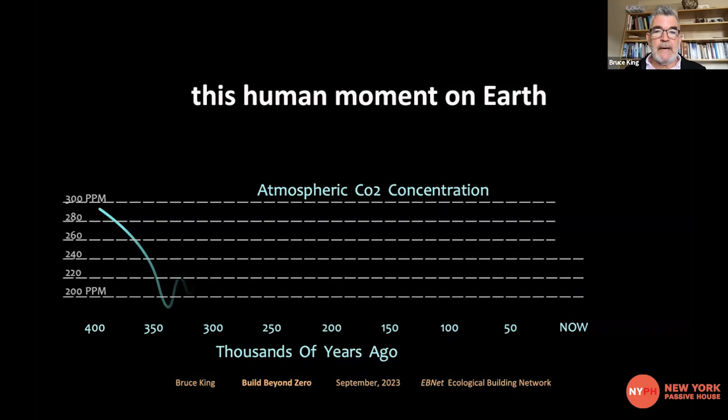Let's do a quick review of the context we're in. For the last 400,000 years or so that our particular family of primates has been evolving on Earth, carbon dioxide has been more or less steady between 200 and 300 parts per million.

And of course, a couple hundred years ago, we went wild when we discovered fossil fuels and all the goodies that go with that. Now the price tag is coming due and we're finding ourselves in dire straits. Last I checked a couple days ago, the count was 419 at Mauna Loa.

Here's the thing. Even if we were to stop burning fossil fuels on a dime today, we would still be in trouble. Common sense and the IPCC tell us that we have to pull carbon back out of the air in addition to stopping the burn.

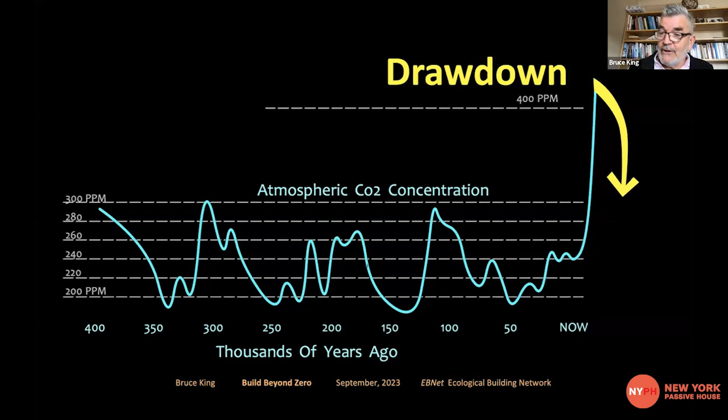Which brings up the question, where are you going to put it? Right now, the oceans are doing most of the heavy lifting for us, which is proving to be disastrous for the oceans and oceanic life, and therefore for us and all other life, because everything is based out of the ocean. Where might we put carbon if we draw it out of the sky successfully?

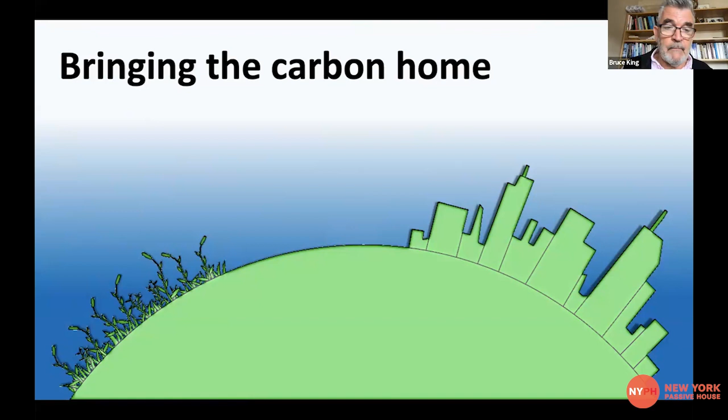Well, the first and probably the best and maybe the biggest repository is soil. There's all sorts of people, some of them in this room I'll bet, doing work with regenerative agriculture. How do we grow our food and restore the carbon in the soil that we've been depleting over the last couple hundred years?

Another one is to pump it underground. That's very popular in certain circles. Right now, the US taxpayer is paying oil companies to pump carbon dioxide into depleted oil fields to replenish them and get more oil and gas out of the deal, and then claim they're doing climate work. Something a little screwy about that scenario. And we're not quite sure about the durability of the carbon down there. It could become a problem later on.

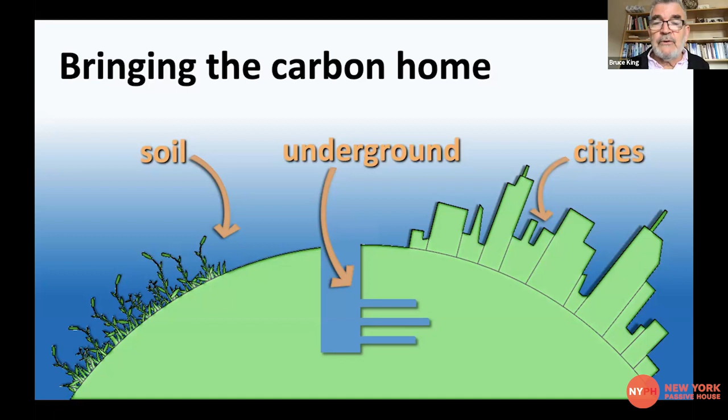Then there's us, architects and engineers, designing buildings and cities at a fast clip. We use more physical stuff than every other industry combined in our construction, and we're doing a lot of it. In case you hadn't heard, we're building the equivalent of another New York City on Earth every month right now.

Buildings account for about 40% of greenhouse gases. I'm pretty sure you've heard that. It comes in two phases. First you build it, the embodied or upfront emissions from the materials and products you chose and the trucks roaring around. Then everybody moves in, turns on the lights, turns on the HVAC, and over the course of 40 or 60 or 80 years, the operating emissions eventually dwarf the embodied emissions for just about every building type.

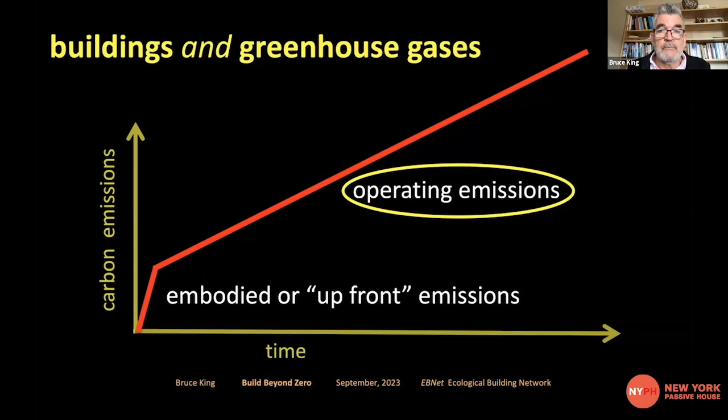And so that's what we've been focusing on in green building, right? That's why you're gathered—passive house and net zero movements all over the place. And it's great. We brought those operating emissions down with great success on at least some buildings to or near zero.

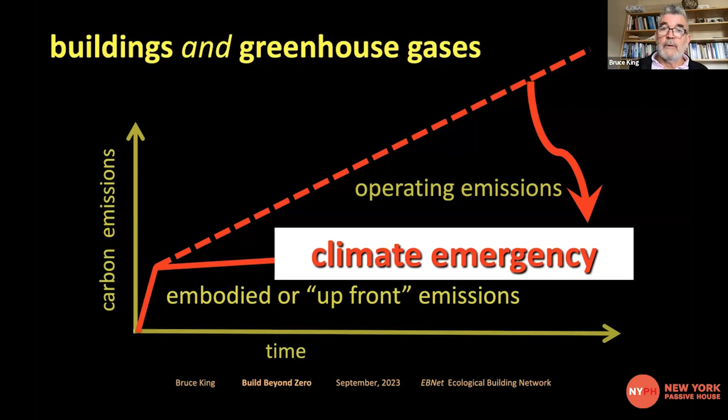Problem is, we have a different context now that we weren't really aware of even 5 or 10 years ago. We're in emergency now. It's not just climate change, it's climate emergency. We're feeling the effects all over the place. I'm in California with the fires. You're getting the hurricanes. Somebody else is getting the floods. It's happening now. What can we do?

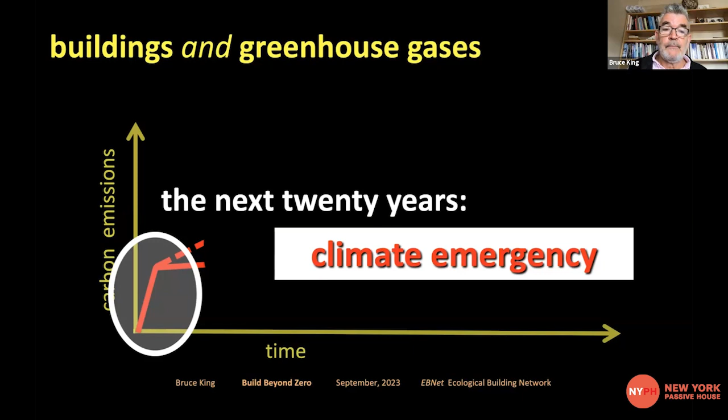What can we do in the context of climate emergency? Well, think triage. Think the next couple decades, not the 60 or 80, 100-year lifespan of the building you're designing right now, but the next 10 or 20 years. In that context, things look quite different. And the embodied emissions prove to be much bigger because they're in the air longer. It's not just how much carbon you put up there, it's how long it's in the air. And the embodied emissions are up there cooking us away before you even move in to occupy the building.

How do we get to zero and beyond? How do we get to regenerative? How do we get to where business as usual is buildings and cities, every one that goes up is taking carbon out of the air rather than putting it in?

Two basic categories of building: minerals and plants. Those are the two categories of stuff we build with. Minerals, it's mostly about concrete. That's by far the biggest. If it were a country, the concrete industry would be the third biggest emitter on Earth after China and the USA. It's huge.

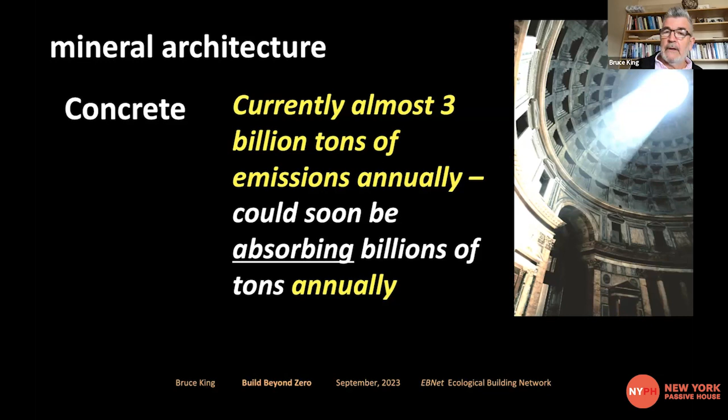And it could flip all the way around in just a generation to be a carbon absorbing entity. I first heard some years ago that we're making something like 10 billion tons a year, mostly the Chinese and the Indians, of course. I got to wondering about the numbers because we see these big numbers, 10 billion tons. Well, your eyes glaze over, you go, yeah, another big number. So I did the math. 1 ton of concrete is desk height. 10 billion tons of concrete is a cube a mile on a side. It's 5 times the height of the Eiffel Tower, and that's what we're producing every year. Pound for pound, concrete is a very low carbon material, but a cubic mile of anything is going to have some impact.

Metals and glass are the other two big mineral products we work with. And since they're already operating at a very high recycling rate, you're going to hear more about that in a moment with Positive. Their big bet is on hydrogen. Replace that intense fossil fuel energy, the intense energy that they need to melt glass and metal, and replace fossil fuels with hydrogen, and then replace the hydrogen available today with green hydrogen made from renewable energy. And that's coming on strong.

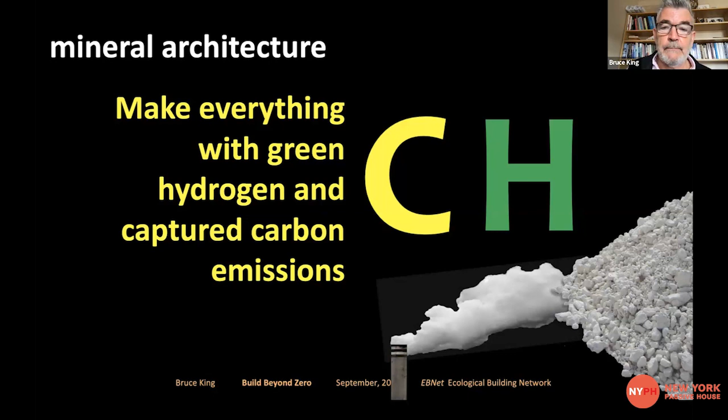Then you got plants. Let Mother Nature do the work. Let her gather the carbon out of the air and then use the plants to build with from the forests and from the fields.

You need to understand about plants, whether it's grasses and hays or bamboo or timber and mass timber, that a lot of the carbon is in the ground. A lot of the carbon is out of sight. The plant you see is only a portion of the mass of the plant and the carbon that's being stored in any particular location. So how we harvest those plants matters in the climate picture, because a lot of that carbon's underground. And if we muck it up, we're making more of a climate mess rather than fixing it.

Mass timber. Everybody loves mass timber these days, and all sorts of cool buildings are going up. It is cool. We couldn't do this before, but we worked out how to cut the wood and glue it back together in ways that originally was just plywood, then OSB, then glulam beams, and now it's mass timber, and we can do large buildings with mass timber that previously we could only do with steel and concrete.

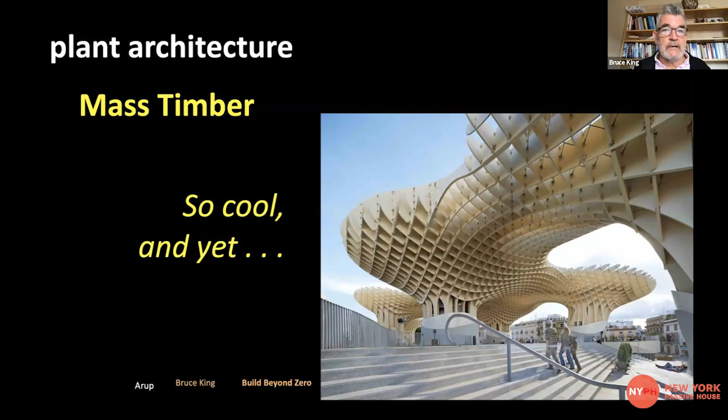Let's just say it's muddied, and at the very least, you should use sustainably harvested lumber when you do use lumber. FSC certified is your best bet.

Well, straw, right. The world grows a lot of straw. I told you about that cubic mile of concrete. The world also grows about 1.6 mile cube of straw every year, which is the waste product left over after you've taken the barley and the oats and the rice that we eat. The straw left over, which at great quantity becomes a waste problem for the farmers. If we turned all the current straw harvest in the world into insulation materials and building products, we would negate all the emissions from the concrete industry. Chew on that.

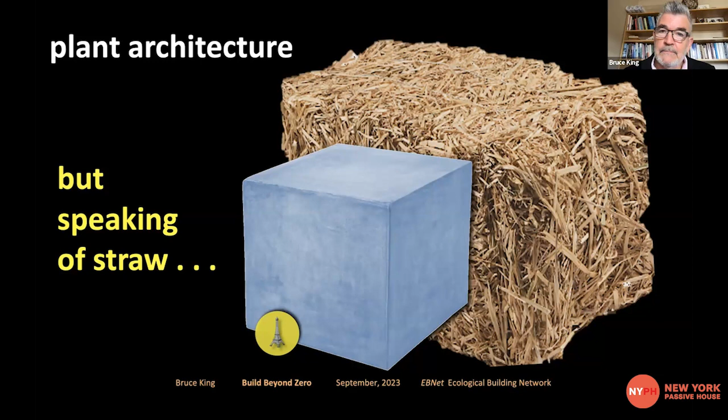We've been building with straw for millennia, actually. It's one of the original building materials, stuffing it into walls and putting it under our beds and so forth. But it sort of had a new beginning with straw bale construction invented in the Americas, in western Nebraska, actually, 120 or so years ago. Very picturesque, and some of those buildings are still there. People went back and studied them, and a renaissance came out of that 30 years ago, and it became this big thing. Straw bale construction still is a big thing, but you're not going to build another New York City out of bales of straw.

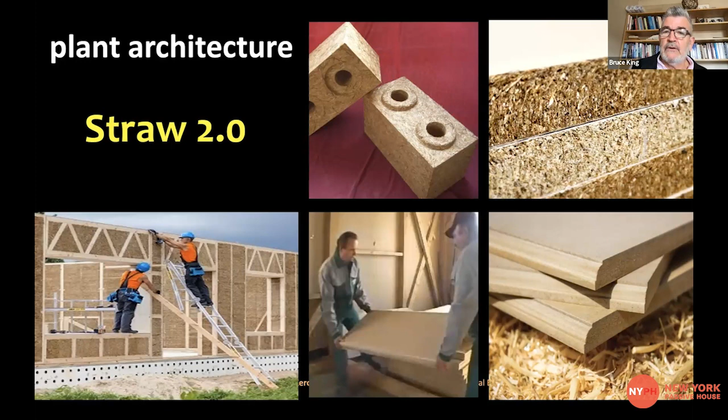So what can you do? You can have straw 2.0, and now there are more products than I can keep track of all over the world using straw as their feedstock. Blocks, insulation systems, spray insulation systems, panels. The French in particular are way ahead of us on this, doing fabulous buildings, big buildings, routinely all over the place. The British are doing stuff, the Australians, the Canadians. Straw bale construction itself, like those other two American inventions, democracy and jazz, has spread all over the world just on its own merits. People love it. It's a fun way to build.

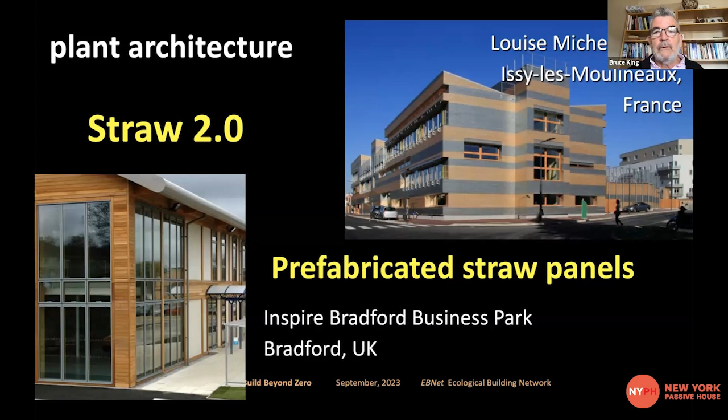And now it's going urban with straw products that accommodate where you can't have a wall that's this thick, you have to go this thick. What do? This is the answer. And just by the way, you can insulate with cellulose. You're going to hear more about that in a moment too, with wood chips, with wood sawdust, with straw, with hemp. And they all absorb carbon. They store carbon in your building, unlike those spray foams that are emitting huge amounts of carbon with their application, especially the spray ones because of their blowing agents.

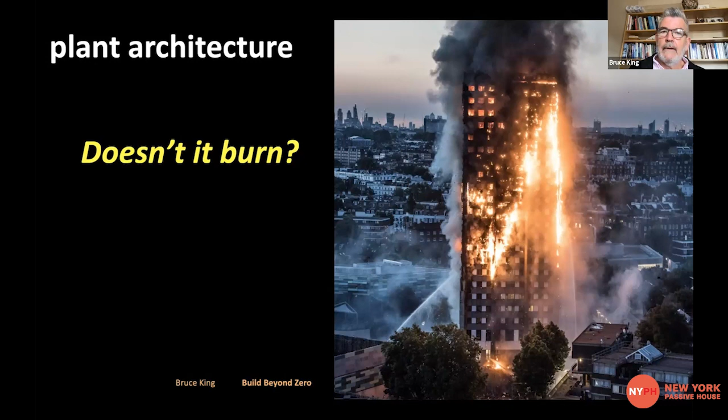People sometimes ask us, well, straw, it's going to burn, right? Sure it will if you give it a chance. So will plastic foam. Some of you will remember Grenfell Towers, right? 6 years ago, a bunch of people died. And that wasn't because they used straw in the walls, because they used a petroleum product to insulate the building, which fed the fire. Something about our culture is we think, oh yeah, plastic foam, that ought to be fine, but straw, I can't trust it. Well, making your building out of petroleum products is kind of inherently problematic with regards to fire.

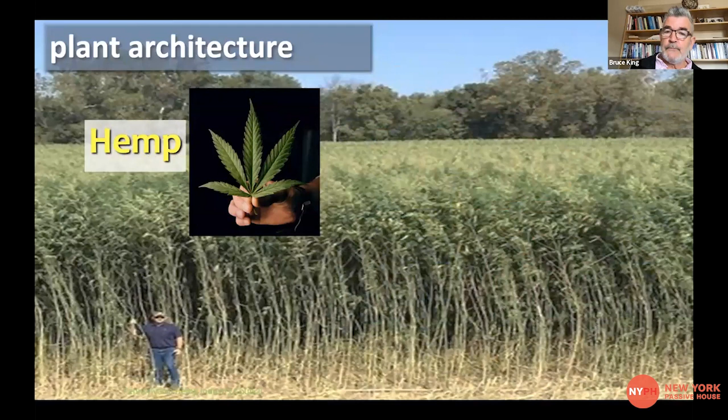We have some bespoke crops that are coming on strong. Hemp, one of my favorites - it's just great, you can do all sorts of stuff with hemp. There's a reason why our ancestors used it to make rope for their sailing ships - among all plants, it has one of the strongest fiber and aspect ratios at the cellular level. So it's very tough, durable, and strong. Make blocks, insulation, all sorts of stuff, and many products coming online.

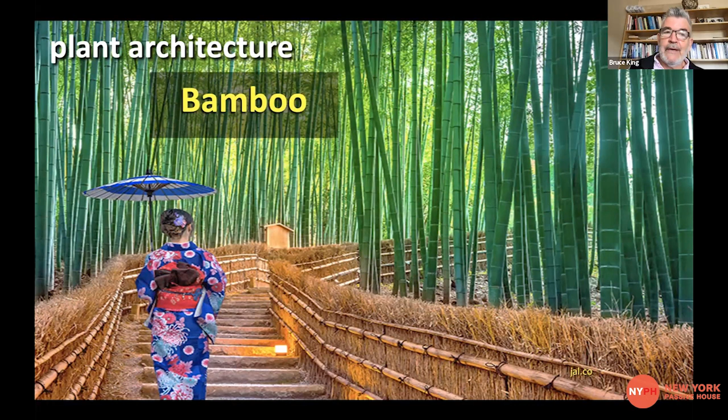Likewise, bamboo also grows like a weed, and by itself you can't do much with that strange, lumpy looking huge piece of grass. People do, and there's fabulous architecture going up in South America, Central America, the Pacific region. It's not what you'd call affordable housing, but certainly beautiful, very labor intensive, very lovely. Okay, not relevant to us, right?

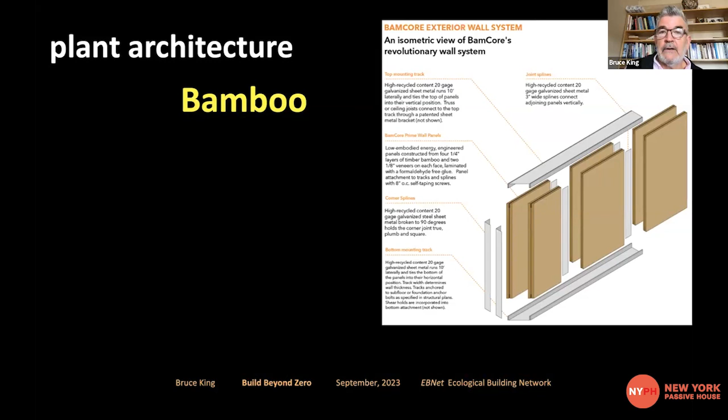Well, but then people started playing around with the bamboo, and you take those bamboo columns and squish them down and glue them together like we do with wood now, and you can make panels. A company out here in California, BamCore, is doing that, making panels that have a whole lot of extra energy efficiency. You can build a wall without any studs that are thermal bridges.

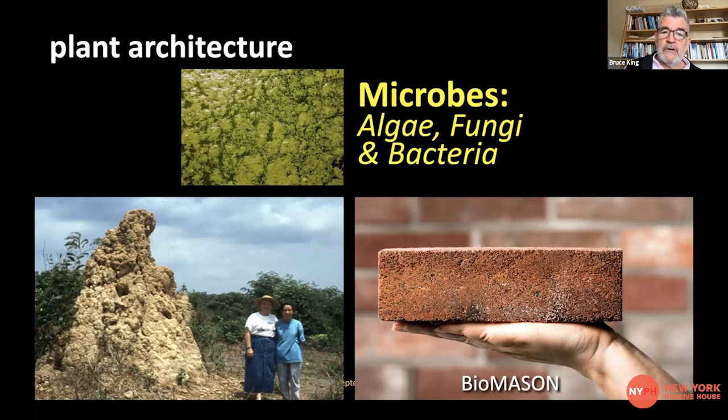Possibly the biggest one is microbes - using our little friends, the algae, fungi, and bacteria that we're only starting to learn about, to make concrete, insulation, all sorts of things. And among all the building materials, they stand out - not because you can see them, because you mostly can't. But of all these plant products, the microbes stand out for this very reason.

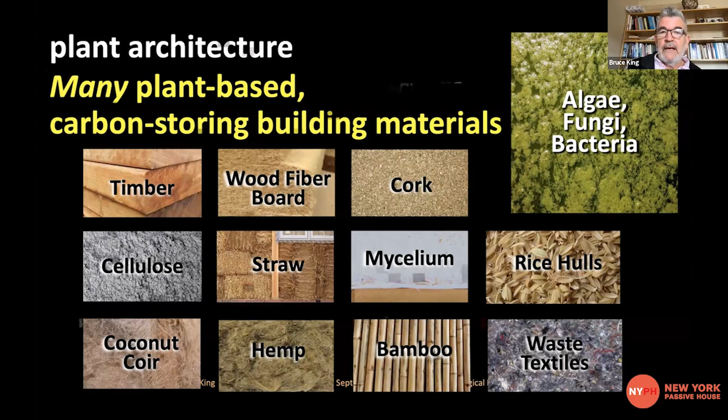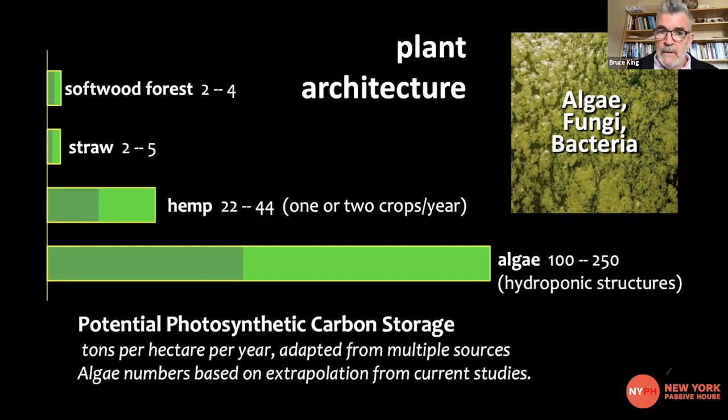My friends did some studying a couple years back to find out how much carbon you could store per acre, per hectare of land. A softwood forest: 2 to 4 tons. Straw field: 2 to 5. Hemp, looking much better: 22 to 44. Looking real good, right? But then when you look at what microbes can do - theoretically, nobody's got an acre of microbes growing and creating stuff yet, but people are developing microbial concrete, microbial insulation, microbial glues, just about everything. And that's where we can really seriously store some carbon.

It's surrounding you with hundreds of different polymers in the building you're sitting in. It's on your body, you're wearing it. It brought you your last meal. It's everywhere - the utility is fabulous. And the horror of it is starting to become clear to us because it won't go away. You throw it away, think you're recycling it - it ends up in a landfill, in the river, in the ocean. Then it breaks down and chokes all the little ones, all the life, all the plankton that are the basis, as we now know, of life on Earth.

What do we do about that? We could have a whole day about that, couldn't we? There's lots of people working on it, but please be conscious, please be sparing. I did a project here in the Bay Area with a wonderful Silicon Valley power couple who were really great people, and they wanted to build the greenest possible house. Among other things, they had a goal of no plastic, and we couldn't do it. We could eliminate it in a lot of places, but the insulation on the wires and a few other places - we couldn't have all the goodies everybody expects with a building without the plastic. So we've got a big job on our hands replacing that.

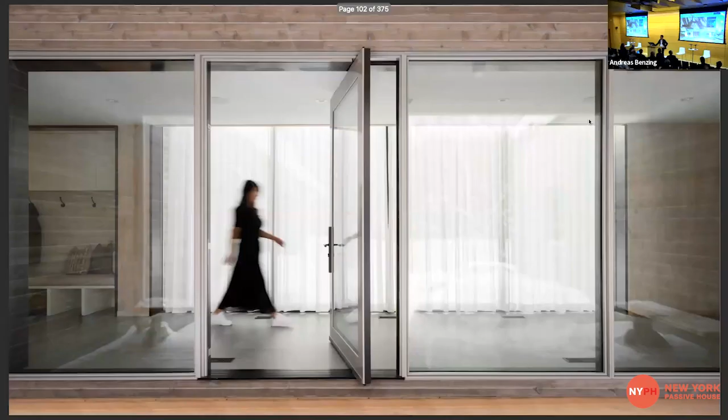As I got into it and developed my understanding of what buildings meant to the environment, I realized that just building a beautiful building isn't enough. We have to be really focused on the impact those buildings have, because we as architects have an outsized impact on the environment. Taking that seriously is extremely important.

As I developed, I realized we had to focus first and foremost on emissions, which is why we certified and built the first passive house in Maine, the 12th in the United States, back in 2008. That was really early days for the North American passive house movement. All these buildings you see here are passive house certified, close to the standard, or net zero. That's all we do and that's all we build.

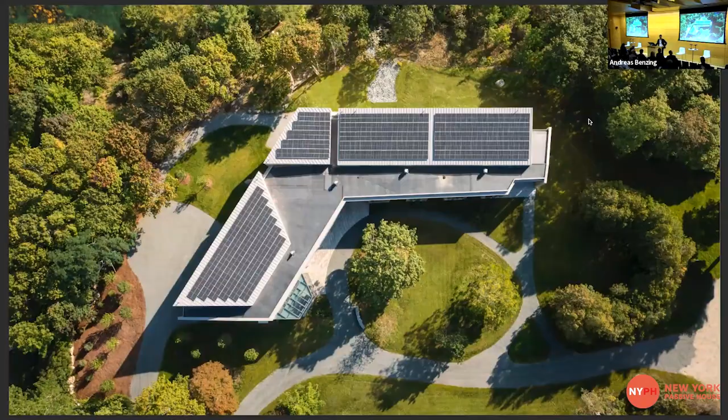But we also realized the more we got into it that passive house is great on operational carbon, but there's a lot more to the story, just as Bruce so eloquently described and the previous speakers did. So as we were focused on building lovely buildings to the passive house standard, we realized it's time to focus on the materials we're using to build with as well.

So getting onto the three companies that I have: Opal Architecture, that's the work that you saw. Timber HP, we're a startup manufacturing insulation from the residuals of the lumber industry, the waste stream. And Opal Build is a CLT panelization company, sort of the love child of Opal Architecture and Timber HP.

This statistic is widely known, shown at least 3 or 4 times today already. Buildings emit a lot of carbon into the atmosphere, a third to two-thirds operational embodied. That's why I started in passive houses, probably you all did as well, which is a great solution to reduce operational carbon as the baseline for net zero construction.

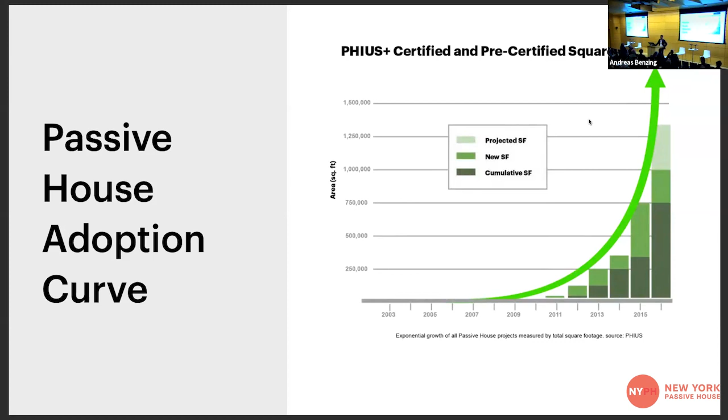We can take pride in the fact that this has adopted a hockey stick curve of adoption in the marketplace, and has really influenced conversation and policy around the country, which is critical to move forward, particularly on goals to net zero. This is a statistic by the AIA 2050 goal of net zero buildings, meaning our cumulative carbon over that time period will level out to zero as defined by net zero in terms of carbon.

That's a huge victory. When I started in 2008, I never would have believed it would be possible, but I do think it's possible now. But as Bruce also said, the embodied carbon of all those new cities we're building year after year is going to be equivalent to the savings of operational carbon from here going forward. So we really do have to focus on the materials and the carbon in the materials we use to build our buildings.

When we started looking at the project, I'll admit I wasn't interested in embodied carbon at first. I was interested in the human health of the installers putting the materials up. I had a design-build company and was constantly getting complaints about what insulation is like to install, and I took that seriously. But looking at this detail, a statistic by RMI, Rocky Mountain Institute, you'll see insulation has the greatest opportunity for carbon reduction.

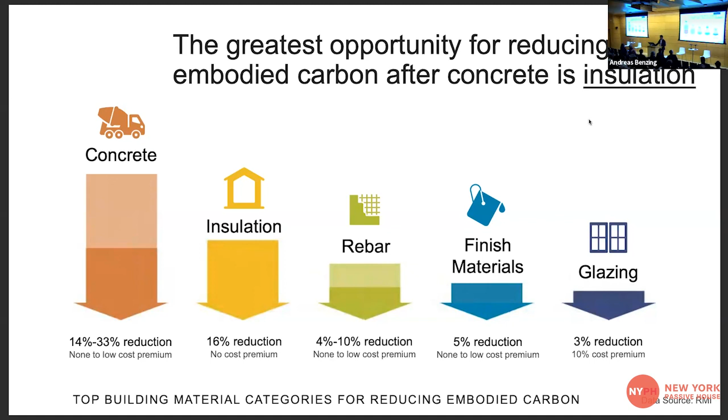Why is that? Because insulation is not sexy, and it's a dumb material. It has one job: keep the warm in, the cold out. It can be made from a variety of feedstock materials — glass, fiberglass, steel slag, oil, or biogenic recyclable materials. So when we're talking about conversion to a biogenic economy, we're talking about where the low-hanging fruit is, and replacing insulation is a really good starting place with great opportunity and no additional cost.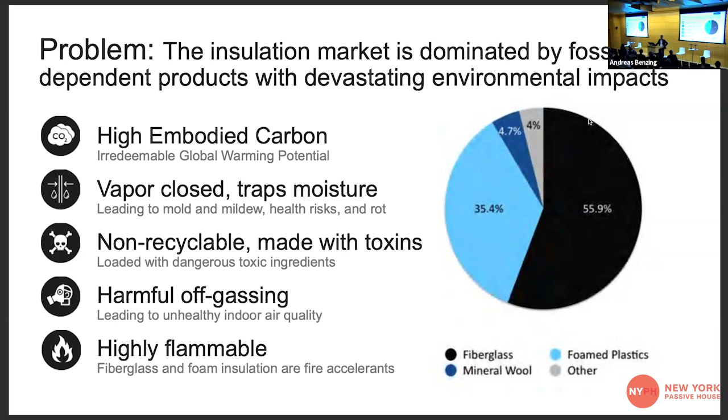This is a slide we're all probably familiar with. We saw Grenfell already burning today. We know insulation has installation issues, but it's also non-renewable, non-recyclable, and in many cases toxic. So when we're looking at the carbon footprint specifically, it's really about the question of what are the viable biogenic sources that we can replace these insulations with that are scalable and cost competitive.

The other thing insulation does, as we all know in the passive house community, is save energy or save carbon. The fact is, with a carbon-storing or carbon-negative material, you come to the job site carbon negative from day one. When you have high carbon footprint materials, like those listed on the right, it takes a certain period of operational carbon savings to pay back that carbon footprint.

I think we all agree we have a climate imperative, and 10 years of carbon savings to pay back the original footprint of those materials probably isn't going to work for us. It's probably not an acceptable solution. We have to be carbon negative day one.

That's us. But nonetheless, we looked at this opportunity around wood fiber insulation. It's an above grade suite of insulation, a blown-in product replacement for cellulose, a batt product, press fit cavity, and a continuous exterior board insulation, renewable, recyclable, carbon storing, thermal performance competitive, and importantly, particularly the board product is like a Gore-Tex.

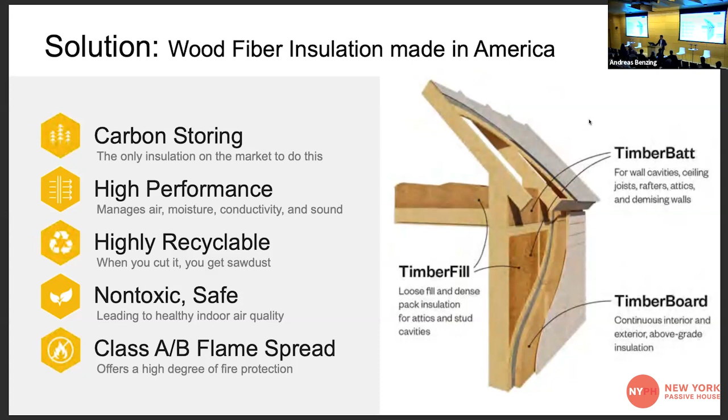It's windproof, it's waterproof, but it's vapor permeable. Instead of putting a continuous exterior insulation such as plastic, which is impermeable, wood fiber insulation breathes, allowing the building more durability and better moisture management. Can be used in a variety of applications, thermal and acoustic.

Its density gives it high STC classification similar to mineral wool. It has a long track record in Europe, it's been there about 20 years. It's about 5% of the market right now of the European insulation products, and it's growing rapidly because of the carbon story.

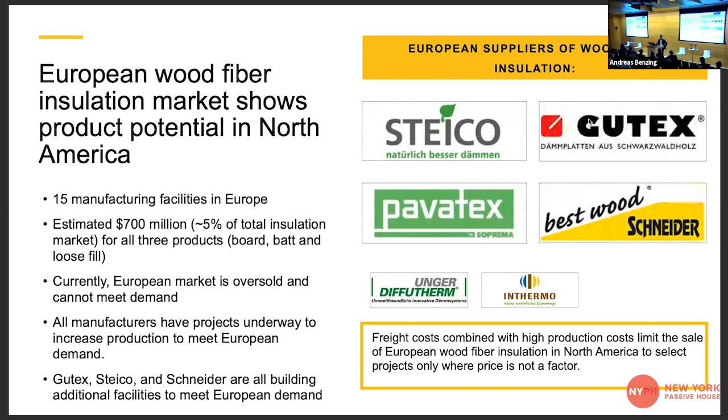But the trouble with it is until recently, it wasn't manufactured domestically. So we're coming from the state of Maine, where we have incredible forest residuals, and by the way, most of our forests are FSC certified, so sustainability is a high priority. But what we're doing with wood fiber insulation is we're not cutting the trees. We're taking the byproduct, the waste stream from the lumber industry, those little chips coming out of creating dimensional lumber out of round logs. That's about 50% of the tree right there.

That used to be diverted to paper mills. In the state of Maine, we lost 8 paper mills since 2016. That was a net negative impact on our economy of $1.6 billion annually. Unlike New York, Maine is not a very rich state, and that really, really hurt our industry.

So there we have residual piles. And when we started Timber HP back in around 2015, 2016, those are softwood residuals, which are the feedstock for wood fiber insulation. We were wondering, why the heck isn't wood fiber insulation produced domestically when we have this massive, inexpensive reserve that we could create a value-added product, not only creating a solution for buildings, but also rural jobs and supporting the lumber economies.

Maine, as I said, is highly certified. We have a regeneration rate which really justifies increased use of forest products. And that story repeats itself across the United States. It's not just Maine, it's Oregon, it's the upper Midwestern states that have lost paper manufacturing, and a great opportunity to sort of revitalize rural economies and jobs in forest states.

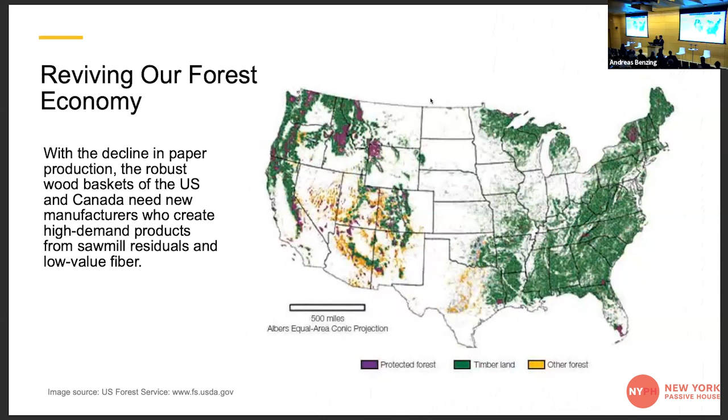And then now this isn't really working. All set. All right, so there it is.

In 2019, we bought an abandoned paper mill. So this is a great example of recycling infrastructure. 600,000 square feet. We've been in the process of reconfiguring it to a wood products manufacturing facility. We'll be employing 125 people.

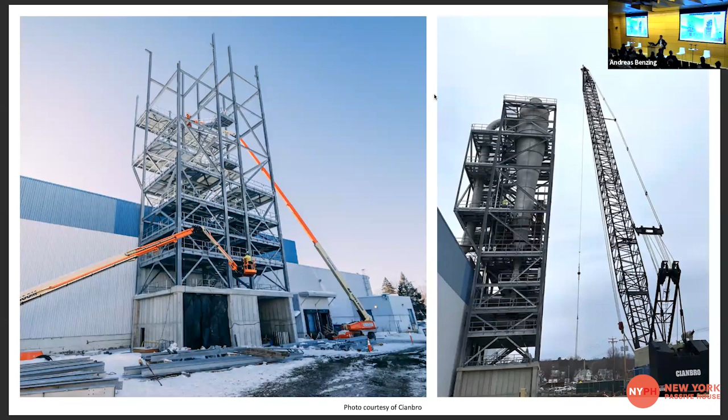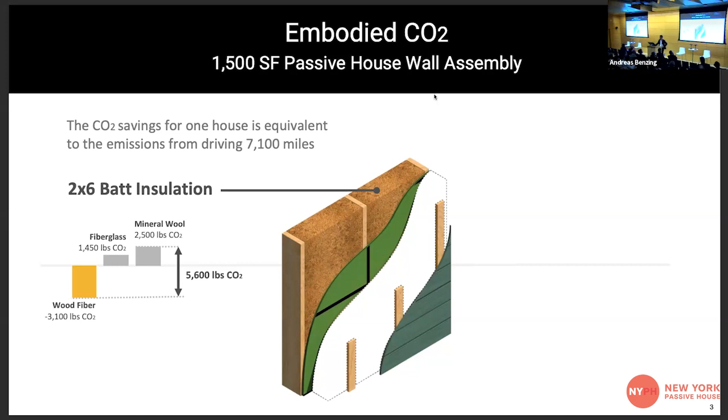And the carbon story around it is when you're looking at the insulation in the standard construction, just looking at the insulation products using one of our batts relative to some of the existing products on the market, you can see a savings, which is relatively impactful on one house. But when you consider that we're building 1 million houses a year in this country, not to mention all the retrofits, that really starts to add up as a beneficial solution. We're just talking about the replacement of insulation here.

The second thing is when we're thinking about passive house cold climate, we're getting it in Maine up to an R50 wall. The continuous exterior insulation then has another significant impact. This is just the walls, not insulating the roofs and ceilings and so forth. So again, it's a really promising story on the opportunity around carbon savings just by the replacement of high carbon footprint materials.

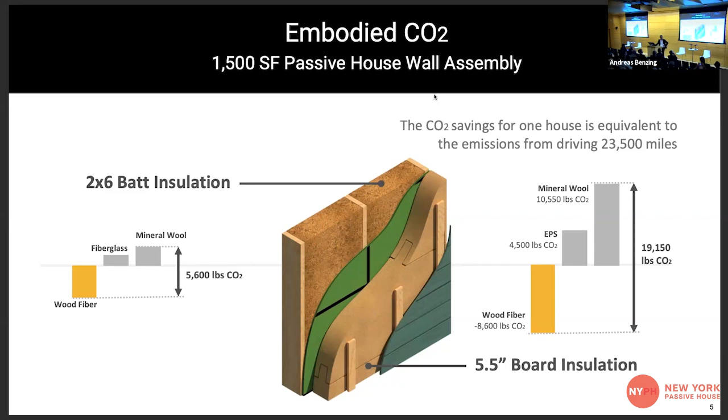We're in production with our loose fill product, which has taken a lot of blood, sweat, and tears to get up and running in a very expensive project. We're actually starting the batt line production next week, which is great.

And then our board will come into the market early next year, so they will be available in the marketplace. In terms of utilization, the batt and loose fill are Class A, treated with boric acid, about 4% by weight total, which extends their use into a variety of construction types. The board is Class B. Eventually, when we're starting construction, we'll have a Class A board, which I know is relevant to a lot of you folks building projects here in New York. So thank you all.

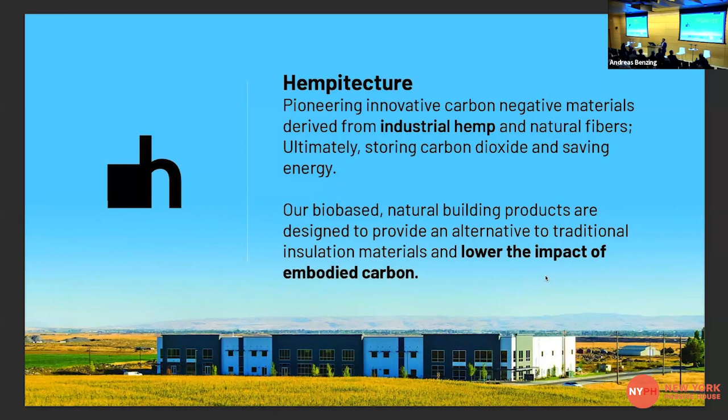But I'm really excited about the progress that we're making. Companies like Mats that are bringing wood fiber insulation to market—this is representative of the new interest that we're seeing, as well as the awareness that is helping bring these products to market. So we need to keep making progress. And I think that's why we're all gathered here in the room today, to keep making progress on this challenge.

Overall, Hempitecture exists at the nexus of innovating carbon negative materials derived from industrial hemp and natural fibers, ultimately storing carbon dioxide. It has certainly been a long journey for Hempitecture, starting out in 2013. I'm going to talk more about our manufacturing process and our products.

But before I get there, I just want to point out, we're hearing about a lot of solutions today. We heard Bruce reference straw and different ways of approaching concrete and mass timber and wood. There are lots of different solutions out there. So we represent just one of the many solutions that I think are going to be important for us transitioning to a regenerative bio-based building stock.

So I'm often asked, why hemp? Why not cotton, flax, wood? We, in particular Hempitecture, have selected industrial hemp as our primary ingredient for a number of reasons. First, I just want to provide a note on what industrial hemp is and what it isn't. I get asked quite a lot, what is going on with hemp? This is a uniquely American concept.

I'll point out that we confuse industrial hemp with recreational or psychoactive cannabis. This confusion dates back to the 30s. It's tied to systemic racism and competing industrial interests at the time, and this stigma, to some extent, still exists today. It's important to consider that before industrial hemp was banned in the United States, it was used extensively for rope, textiles, and a wide range of materials.

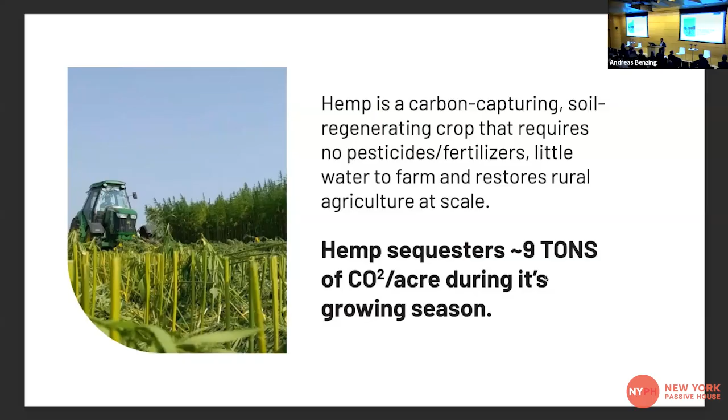No, industrial hemp will not get you high. The reemergence of industrial hemp in the United States is for its fiber, its stalk, and even its nutritious seed that is rich in omega-3 fatty acids. So a few benefits there. It's an agricultural commodity that is grown in large-scale acreage, similar to a crop like corn.

Today, we're relearning this American heritage that was once deeply connected with industrial hemp. But there's a special reason why industrial hemp works so well for building materials.

It's rapidly renewable. It can be harvested in a 4-month cycle or less. Compare that to other materials with much longer life cycles before they can be extracted. It can be grown with very little water or pesticides, although it does prefer water. It can be grown completely dry land, but it also has soil regenerating qualities. Industrial hemp has an incredibly deep root structure that reaches down and breaks up compacted layers of soil, ultimately restoring soil quality and returning nutrients back to the soil.

When we talk about the decarbonization of the built environment, Hempitecture's perspective is not that we just need low embodied carbon materials. Low embodied carbon materials are great, but we need to get our materials from ingredients that do more for the earth. Hemp is a crop that does that. It's improving land, it's regenerating soil quality. It's being used as a rotational crop, which is increasing yield on land that is growing food commodities.

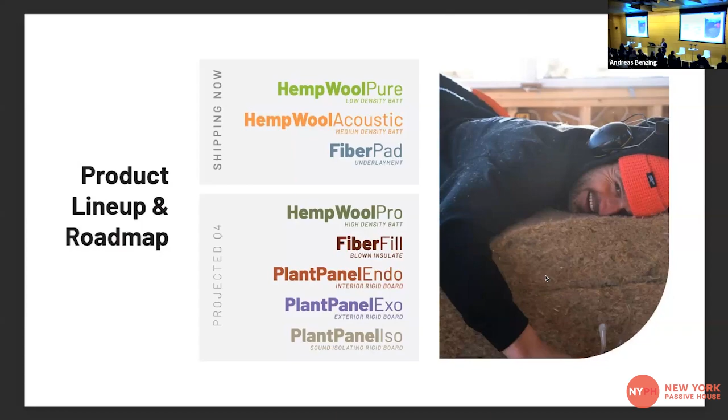But now with our manufacturing facility, we're really able to start to diversify our product offerings. We're going into rigid continuous insulation, loose fill insulation, underlayment products, acoustic products, a whole wide range. We do believe our products could be in the skyscrapers of the future, but we have a little ways to get there, and we're going to talk about how we get there.

As any of these panelists can tell you, bringing new products to market is challenging. It requires a lot of capital, a lot of research, a lot of development, and we're well underway with all this testing that needs to happen, so that we can bridge the gap between the primarily residential markets we're serving today and bring our materials to urban centers like New York City.

So a bit about our products in particular. Plant Panel EXO is a rigid continuous insulation product, and then we have a few cavity types of cavity bat insulation.

As architects and designers, technical specifications are a big part of why we choose certain materials. Probably two of the most important features are thermal resistance and fire resistance. With our manufacturing technology, we're taking that agricultural commodity, that hemp fiber, and refining it as much as possible to extract higher thermal performance in our bat materials. We're ranging from R 3.4 per inch to R 3.7, depending on the product, which is comparable to a lot of conventional insulation. And our rigid board is coming in at 6.5 for 2 inches.

For fire resistance, this is a big deal, and this is something we've invested a lot of time and resources into, looking into non-toxic, bio-based fire retardants. Fire retardants present hazards within our environment, and oftentimes they're invisible. So we've sought a wide array of different fire retardants and tested them to be non-toxic, bio-based, and safe. We're really excited with the preliminary results we're seeing. We've got Class B flame spread coming out for both our board and bat insulation products, and we're ultimately working towards a Class A.

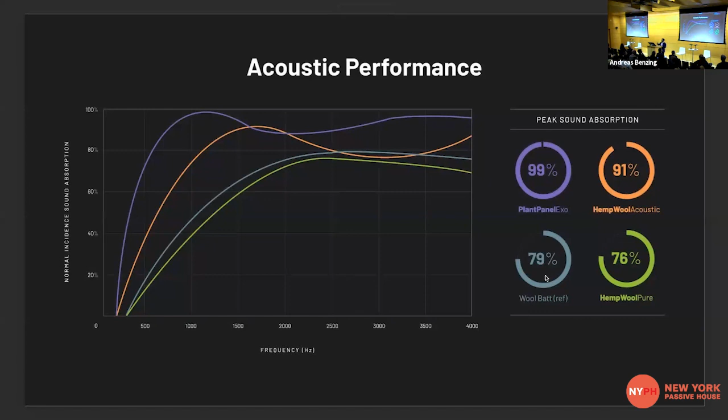Earlier in my presentation, I said we need to keep making progress. It's true, we really do. But I firmly believe we're on the cusp of some really exciting transitions within the built environment. I think this transition is beginning to embrace bio-based materials in lieu of synthetic, toxic materials, and we're bridging that gap. Think of a field under a blue sky that's absorbing sunlight and restoring soil quality. This field is taking carbon dioxide out of the atmosphere. It's bringing dollars to rural economies. It's empowering the next generation of the family farm.

Now envision our world built of materials of concrete, steel, and glass. These are materials based on extraction. At Hempitecture, we're working really hard to bridge this gap between this world of extraction and instead embrace a world of rejuvenation. Through using hemp as a building material, we're rejuvenating soil quality, rejuvenating our existing environment with materials that add thermoacoustic comfort, and with materials that restore our balance between the built environment and the natural world.

So that's our mission at Hempitecture. It's an honor and a pleasure to share it all with you here today, and I look forward to chatting more this afternoon. Thank you.

So, real excited to show you what we have got going on here. What we produce is a ground glass pozzolan.

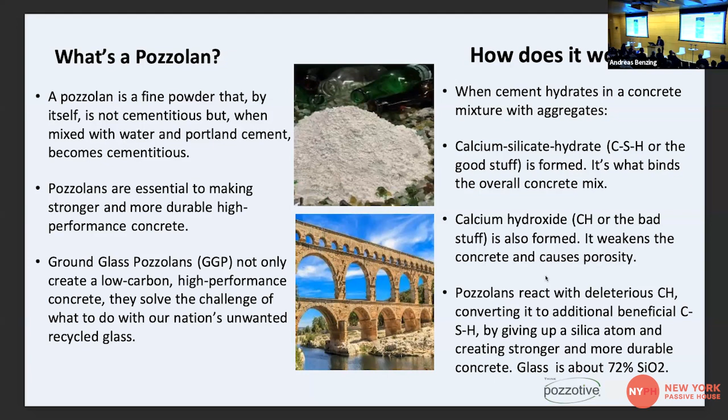I was one of the authors, spearheaded by Amanda Kaminsky of Lendlease, who was an enormous help with getting that done. So through that standard, we created an understanding on how to process post-consumer glass into a pozzolan, creating consistency and quality in the product. That was a big changing point, and it was published - one of the only good things that came out of 2020 - in April of 2020.

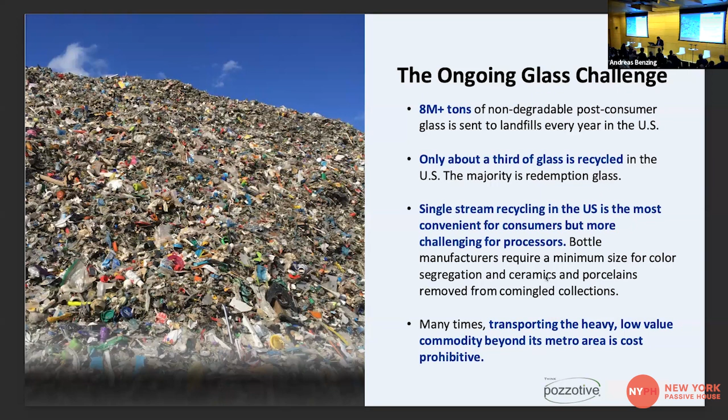So at any rate, here's the other dilemma that we face in the concrete industry and the cement industry.

All of the coal-fired steam electric generating plants have been closed in the Northeast. So if you don't burn coal, you don't generate fly ash, which is a good thing. In the end, you need pozzolans, and fly ash was probably the most commonly used pozzolan in the industry. You need pozzolans to create high-performance concrete. And that goes back to the crisis we have in terms of reducing the embodied carbon by replacing the cement in concrete. Cement is a big culprit of embodied carbon, right?

So what's happening now is a lot of these structures are being built with cast-in-place concrete. You need high-performance concrete to make these cast-in-place structures, and then you need pozzolan to make the high-performance concrete. So you have the demand for pozzolans going up and the supply decreasing. We feel that ground glass pozzolan will help bridge that void.

And then you think about another supplemental cementitious material, which would be slag. Slag is generated from the purification of iron ore into steel. 90% of the slag that we use here in the country is imported. On the East Coast, it comes from France, Turkey, and Brazil. On the West Coast, it comes from Japan and China, basically. There's others as well, but it's not regionally or domestically derived.

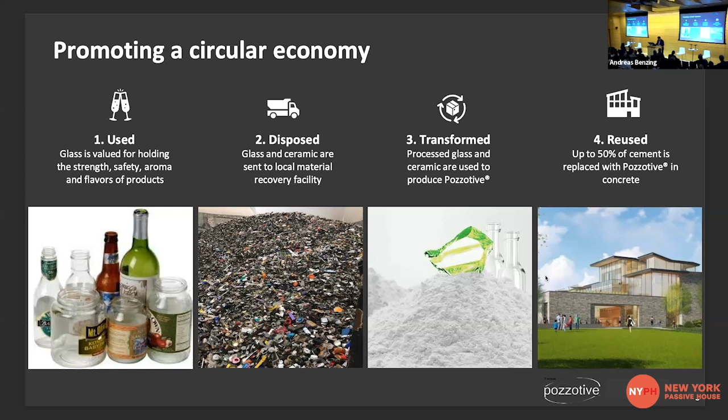This is an understanding of the amount of cement that's used in the United States, about 100 million metric tons, 120 million short tons. So basically, the increase in the need for concrete is obvious with the way that we're building with concrete. Concrete is critical for urban construction. It's fire resistant, the resilience of the materials is amazing, the speed of construction, and so on. So it's a very good material.

How we use our cement to make our concrete is critical in reducing the embodied carbon. To give you an idea, this was done when I presented to MIT about 12 years ago. It's crazy how fast time is going, but this was given to me by MIT. Cement reflects about 10 to 15% of the overall mass of a yard of concrete, and yet, depending on your compressive strength and mix designs, it reflects about 80% of the carbon emissions associated with that yard of concrete. So it's very important how we use our cement and our cementitious materials.

With ground glass pozzolan, it's a pound for pound replacement up to 50%, and it depends on what you're trying to achieve with your mix designs. There's also opportunities to create ternary blends, a mix with other pozzolans or other supplemental cementitious materials. We're actually going as high as 70%, with a 35% replacement with pozzolan, 35% replacement with slag, and 30% OPC. So big opportunities to really create dramatic carbon reduction for concrete.

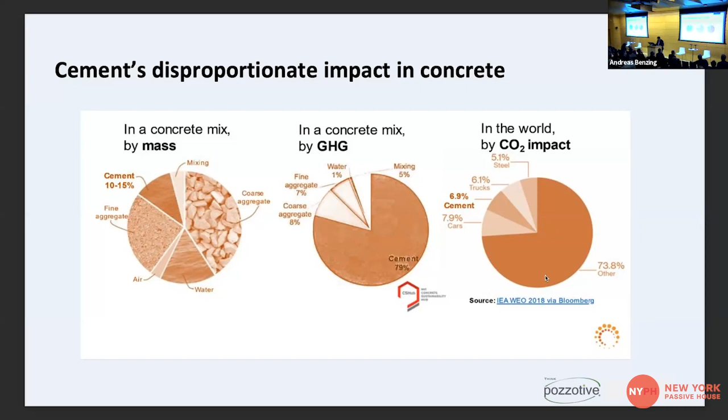Very good study. Another good benefit: when you take mixed recycled glass - clear, brown, and green - on average about 60% of MRF glass is clear, and the others are mixed between brown and green. When you mill it, it becomes bright white. On a scale of 1 to 100, it's about a 90. So it's an extremely white material.

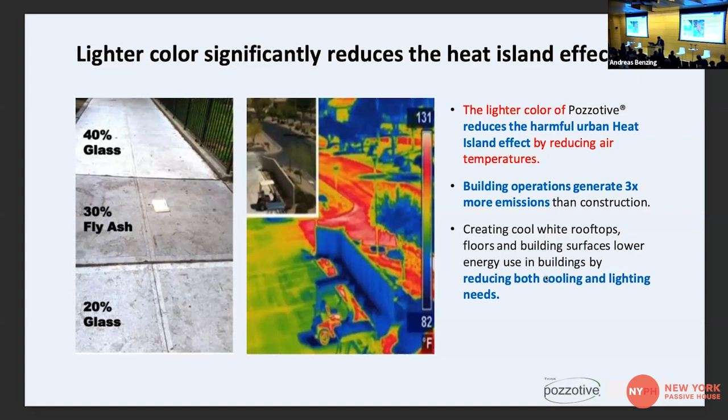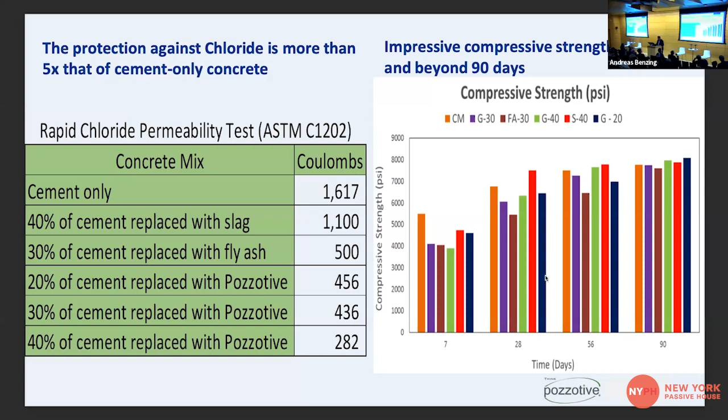This is the new ASTM C1866 specification. This is critical because you need the proper ASTM specifications to go with a product, so that the engineering community can grab onto it and use it. It gives guidance on the material.

It was a very humbling experience for me personally. I sit on ASTM C09, and Amanda Kaminsky spearheaded it, and she was wonderful in getting it done. We actually got it done in 4 years. It usually takes 7 to 8 years to get an ASTM standard approved, but because we had some of the world's leading academics on our subcommittee, as well as some of the world's leading professionals in the concrete industry, it was amazing to get this done. It was published in April of 2020.

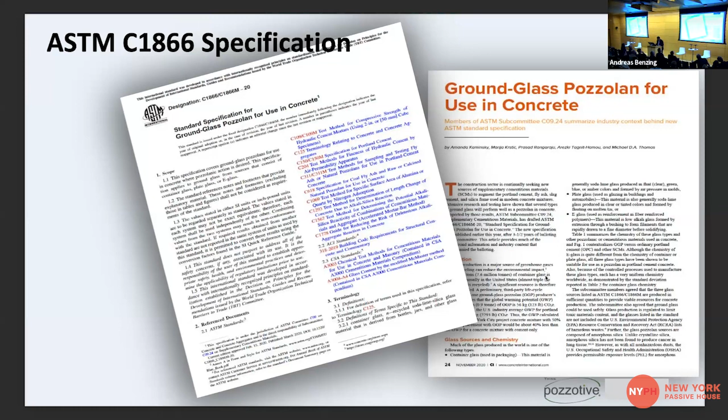Some examples of use: the Hallett's Point project, high-rise pours that went into that building, which you see in this veneer here of 10 million architectural, is way past that now. This is the Philadelphia Ballet veneer.

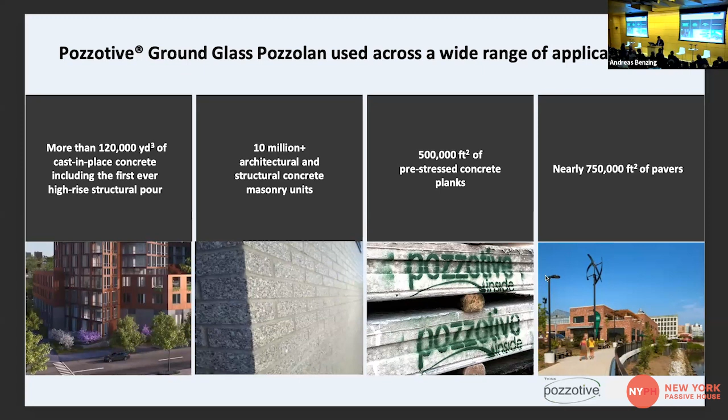Pre-stressed hollow core plank is used in many buildings, including affordable housing here in the New York metropolitan area, a lot of the MAP especially use pre-stressed hollow core plank and high strength CMU for it. We actually have a company in Brooklyn making the high strength concrete block now, which is great. It's that even tighter circular example.

Some of the other really cool projects: Ox Ridge Elementary School in Darien, Connecticut. I can't tell you how excited everyone is - the kids, the parents, the school board, the municipality - everyone is excited about their school being built with their recyclables. We take all of Westchester County's glass, every household, plus Fairfield County, Rockland County, and some percentage from New York City. It's a great opportunity to showcase New Canaan Library, Torrington High School, and some really flagship applications that were used.

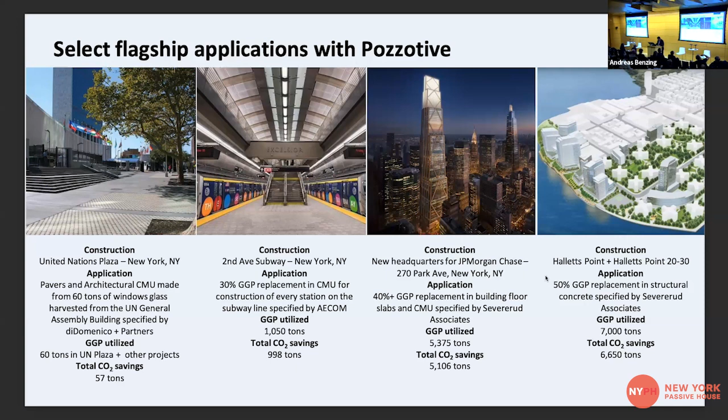We also just worked on a project with the Durst Organization over at Hallett's Point. The material we generate at our plant in Connecticut is actually going as far down to Washington, D.C. There are several projects down there using it. We're working with Harvard University, Yale University, and others in the Boston market, and furthering it in Connecticut and New York City as well. It's so wonderful to see it being accepted far and wide now.

We're in the final stages of negotiations for another plant down in the Washington, D.C. market in Maryland, and another plant up in the Boston market, fingers crossed. We're also working with the New York City EDC for a plant in Brooklyn, to bring it right here back to New York City.

As you can tell from my accent, I'm not from Arkansas. So I'm happy to bring it home, real excited about that. I'm actually from the Bronx, not Brooklyn, but anyway, for obvious reasons, there's urgency to use it—like Bruce suggested, we are in a climate emergency right now, and it's something that could be done now. It's immediate.

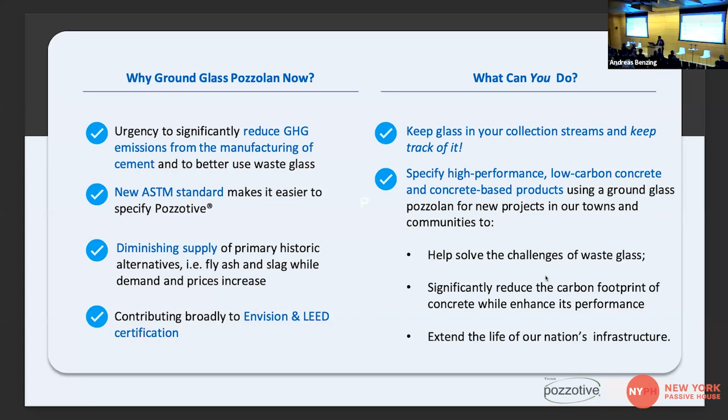There's a new ASTM standard, the diminishing supply of other supplemental cementitious materials, and opportunities to help contribute to LEED category budgets, which is great. There's also the opportunity to solve the problem with recycled glass, and it creates high performance concrete. So wonderful opportunities here, a lot of which we already discussed. Real excited about it.

It's exciting, and I have to thank Andre, Sarah, Allison, John Sarah, and the whole group at the New School for their continued support and guidance—it's really wonderful. The architectural and engineering community is what got us to where we are today.

You people are change agents in the concrete industry, and I'm speaking as one in the concrete industry. Back in 2006, I gave a speech at the National Concrete Masonry Association in Chicago. My son was with me at the time, and he said, 'Dad, these people really don't like you.' I explained to him, 'It's okay, they'll catch up eventually.' In the end, I told everyone in that association: don't look at sustainability as an obstacle, look at it as an opportunity to do good business and good for the environment at the same time. They don't always have to conflict.

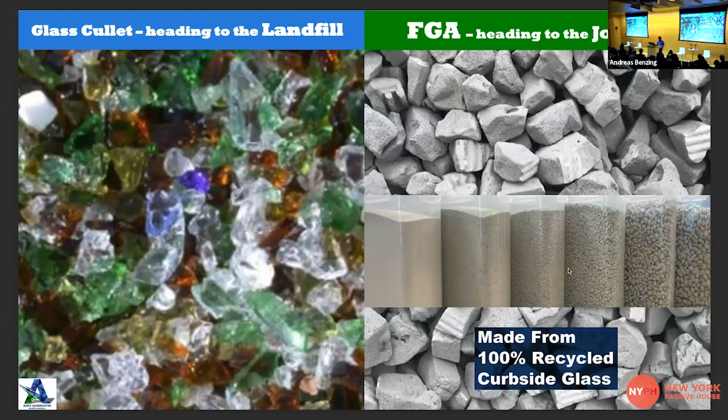So the same as Mr. Grasso, what we have to do is clean the glass. We take the glass from the municipal recycling facility, receive the small particles of glass, and then we have to clean it and mill it. It's very dirty, there's a lot of organics in it. What we're trying to do is remove the organics from the glass so we get it right back down to a pure mineral. We look at the LOI, the loss on ignition, we test it and get it to a very low point, so we have a very low amount of organic material on board.

It's 100% curbside recycled glass. This is soda lime glass, so we're taking glass that's already been used, bringing it in and saving it from the landfill. So what we do is clean it, and once it's clean, we get the LOI proper.

Then we're adding a foaming agent to it. 98% of the matrix is the glass flour, and 2% is a foaming agent. The foaming agent we use is silicon carbide, which we get from recycled solar panels. So we take recycled solar panels and grind that material up to get silicon carbide. Our process is a dry process.

There's two types of foam glass: there's a wet process glass and there's a dry process glass. We do dry process. 98% of the matrix is glass flour, 2% is the foaming agent, silicon carbide.

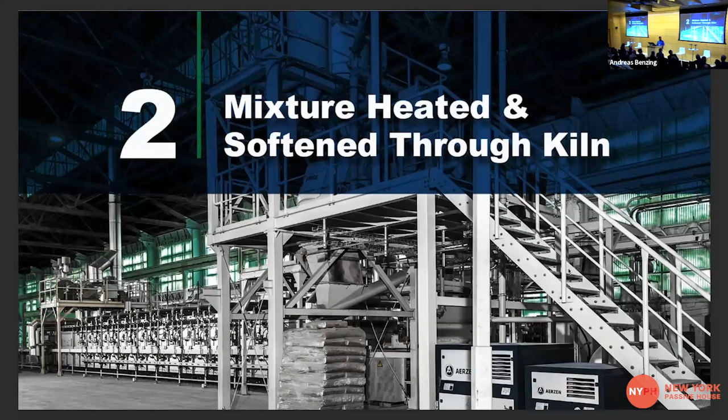You can see here as we go into our kiln, so it's heated. Much like previous explanations, we don't take the glass all the way to the melting point, we just take it to the softening point, generally about 800 to 900 C, so we're not using that much energy. As it's going through the kiln, the silicon carbide, the silica and the carbide separate when it gets to a certain heat signature, and the carbon separates and gives up the CO2 bubble, hence the foaming agent.

We lay down a bed, about 5/8 of an inch thick, and it goes into the kiln. In that kiln, it foams and it raises up to a bed height of about 2 and a quarter inches.

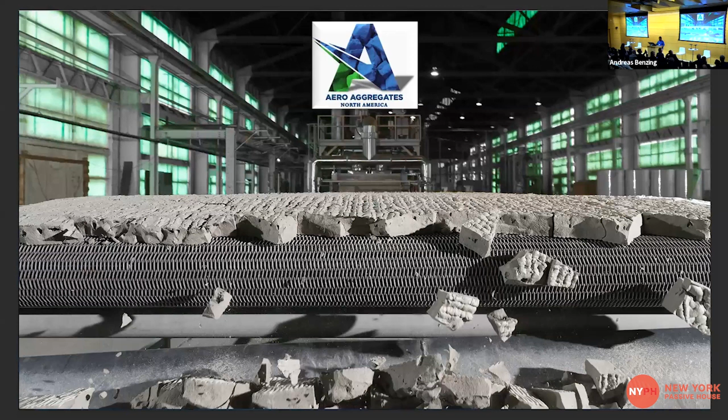This is a picture of our cooling table. It comes directly out of the kiln, and we have no other processing — we don't mechanically fracture it. It's a cooling table, and it's thermally fractured. It hits the ambient temperature of the room, and then it fractures into individual pieces. You can see these pieces falling directly off of our cooling table.

And that's the material that goes into the market for use. In general, the size of the aggregate is around 1 7/8 of an inch, but it's irregular shaped. So some pieces can be smaller or larger.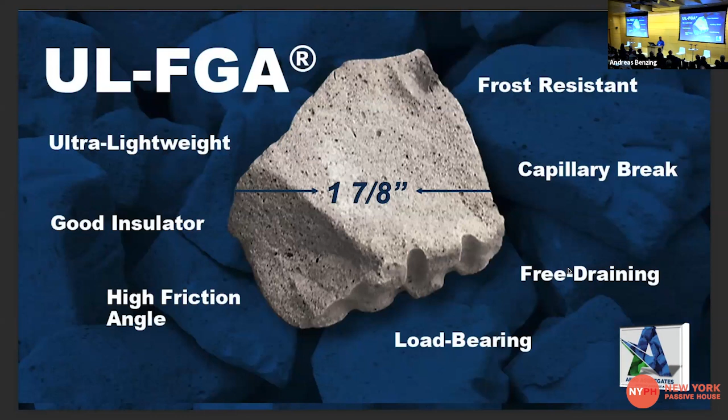A couple of uses for the material in green building applications: subslab insulation. We have an entire team of geotechnical engineers at our company pushing this material, selling it into roadways and civil engineering projects. We're approved by 36 DOTs around the country and growing every day.

And green roofs. Green roofs is a great application. We just delivered 32,000 pounds of our graded material to Boston for a green roof application, where they'll lay down a compacted 6-inch layer as the drainage layer for the green roof. Again, you're only adding 15 pounds per cubic foot to collateral load to the roof.

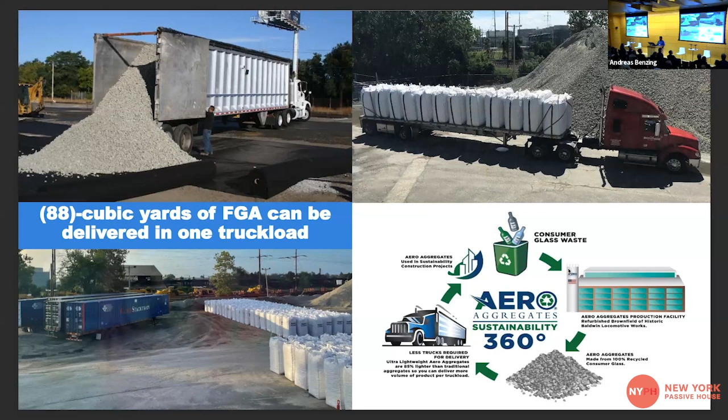For me, this is one of the biggest things here: we can deliver 88 cubic yards of material to a job site. Now that's massive. If you're talking about natural aggregates, regular aggregates, you're not going to deliver any more than 22 yards of material to a job site per truck. So literally getting 4 times the material to a job site in one truck rather than 4 trucks on the road. We package in bulk, and we also package into super sacks.

So what does it do for you? Why are you using this material? Here you can clearly see it being used as a subslab insulation. It delivers thermal performance, it's an insulator. It's taking the place of XPS foam insulation, which really kind of no one wants to use anymore, right? So it's taking the place of that.

It also provides incredible sound absorption. And I should talk about how it's doing that. These individual rocks are comprised of 70% air. If you look at the area within each one of the rocks, it's a closed cell structure and it's 70% air. So that air is doing all the heavy lifting - that's absorbing sound, providing thermal performance, and it does a lot of other things performance-wise.

So we're displacing naturally mined aggregates. Let's talk about that for a second. I think Maddie hit on it really well when he said concrete's an extracted product. We hear so much about concrete, and we're talking about Portland cement. Mr. Grasso's material is great, displaces Portland cement, excellent. But who talks about the mined sands and aggregates in a yard of concrete?

1 yard of concrete, that's 27 cubic feet of material. 17 to 19 cubic feet is mined sand and aggregates. So that's a finite resource, right?

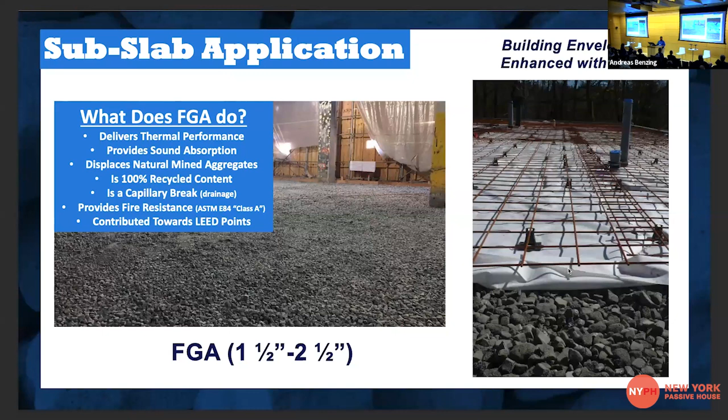Fire resistance - this material is actually a fire suppressant material. It's the best material in the world to put out a lithium ion battery fire. The applications for this material are growing almost daily, and it also contributes to LEED points.

Here's a very rudimentary detail about what it's replacing. Typical detail: slab on grade, a couple inches of rigid foam insulation, and then there's your gravel for capillary break. No more - you can just put down the foam glass. Typically I'm specifying to architects 15.5 inches. Material has a compaction factor of 1.25. You place 15.5 inches, compacted with a plate compactor, you end up with 12 inches. That's 12 compacted inches, gets you the R 1.68 per inch. No need for natural aggregates.

There's another detail showing the same thing. Again, you can put the slab directly on top, go with your vapor barrier, go with your reinforcement, and here you come with the slab directly on top.

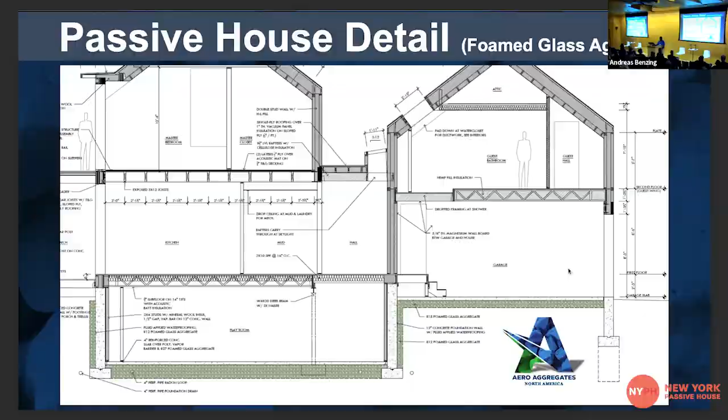This is a project, a passive house that was in Cape Cod. I have actually some pictures of it. As you can see, you can actually run it vertically up along the wall for insulation as well. Very, very easy to install. Here's the project in Cape Cod.

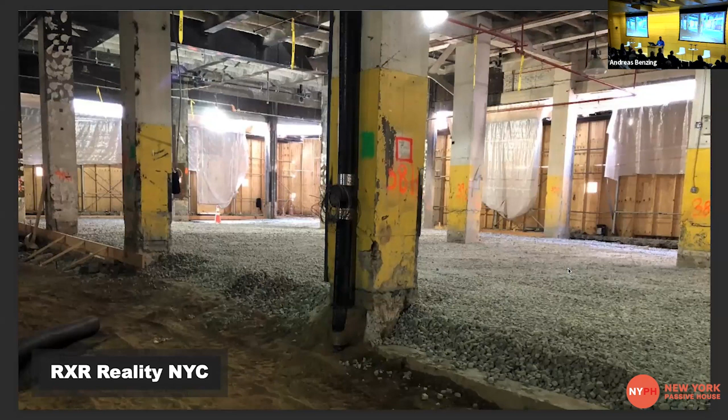I'm just going to run through some projects so you can see that this material has been in application for a long time. In Europe, as Felix can attest, there's multiple manufacturers of this material. In the United States, there's only 2 - we're one of them.

This is a project in New York City. Again, existing buildings - when you have to fill existing buildings and you're worried about existing collateral load, this is the material, because it's only 15 pounds a cubic foot. Here's the finished floor, directly on top of the foam glass aggregate.

So I just got to stop and tell one story about a recent project. I think it was 2 or 3 months ago in Philadelphia - a fuel truck caught fire underneath a bridge deck on I-95, and the I-95 bridge collapsed. The solution from PennDOT, because we're in Philadelphia and we're working with PennDOT all the time, the solution was to use foam glass aggregate to rebuild that bridge. They used MSE, mechanically stabilized earth walls, in 2-foot layers. They built that bridge back up 22 feet and then repaved and opened that bridge in 12 days.

12 days it was opened up. But the cool story is in about 30 days, they're going to start to deconstruct that layer, because they built it from the outside in with the rebar steel in the correct way. They will now get to the middle and they will deconstruct. They will take that material and they will bring it over to another job and reuse it. Absolutely, you can reuse the material - just take it right back out and reuse it.

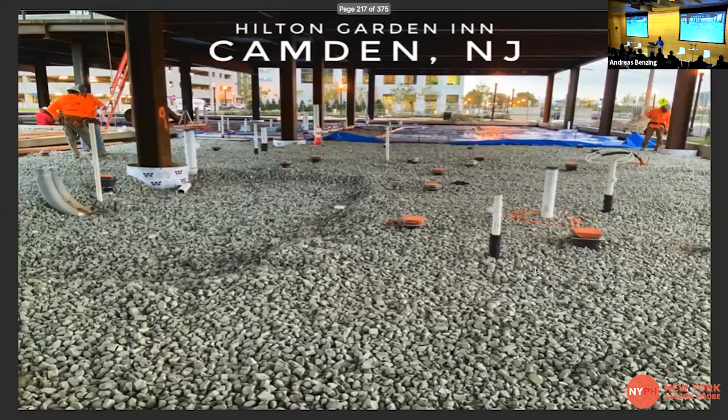That's a geotechnical application. This was a cool project - it was in Camden, New Jersey, at Hilton Garden Inn. This is down along the pier where they have very soft soils, and they had to bring up the grade for this building 4 feet to put the slab. So 4 feet of conventional aggregate or soil would be too much load. So here we're using foam glass aggregate, and with all these interferences and pipes coming through, it's very easy to work with.

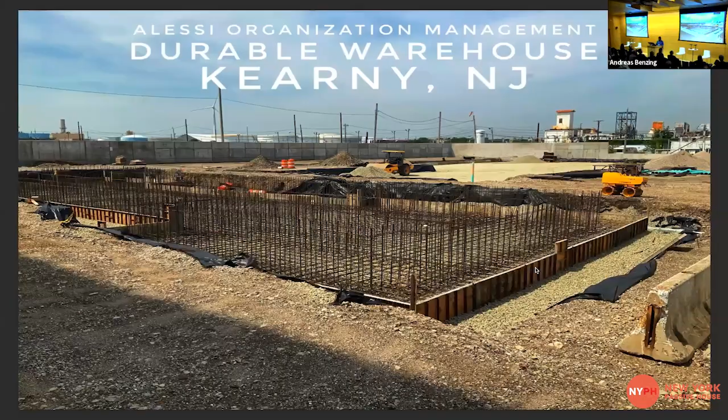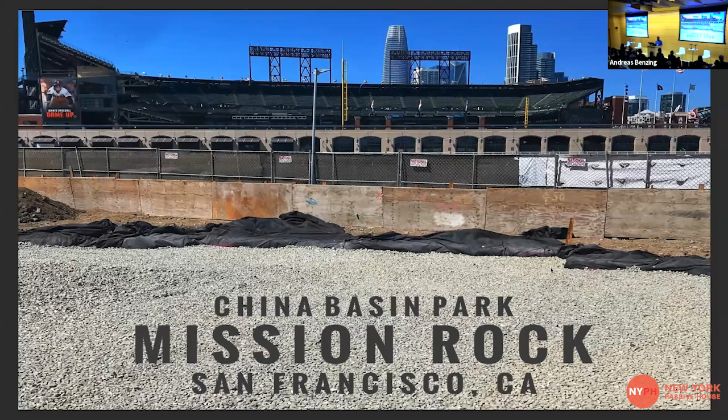We just did a job in San Francisco in Mission Rock, along the pier, where we have soft soils. This is a great application for the material.

Project in New York at the United States Tennis Association. Again, they chose the material here because of all the communication cables and conduits running in the project, and foam glass aggregate was the choice. Another same project, Hilton Garden Inn.

I want to talk quickly about the graded aggregate. So now what we're doing is we're taking the larger pieces and sizing these materials down for use in concrete. If you take a yard of concrete with 19 cubic feet of mined sand and aggregates, you can literally replace that material with a graded aggregate. So this material is 100% recycled content, displacing natural aggregates.

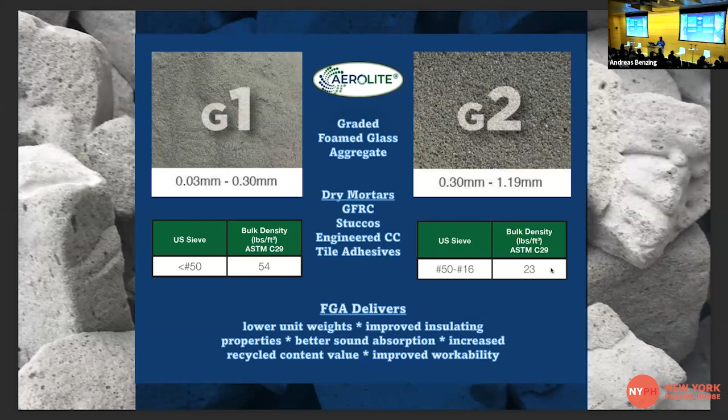So where are you going to use this material? Different sizes - the finer particle sizes go into dry mortars. Someone was asking about self-leveling underlayments - of course, you can use it there too. Different types of dry mortars, stuccos, GFRCs, engineered cementitious composites, tile adhesives. As the sizes go up, we move out of mortars and into concretes, including ready mix, precast, and dry cast.

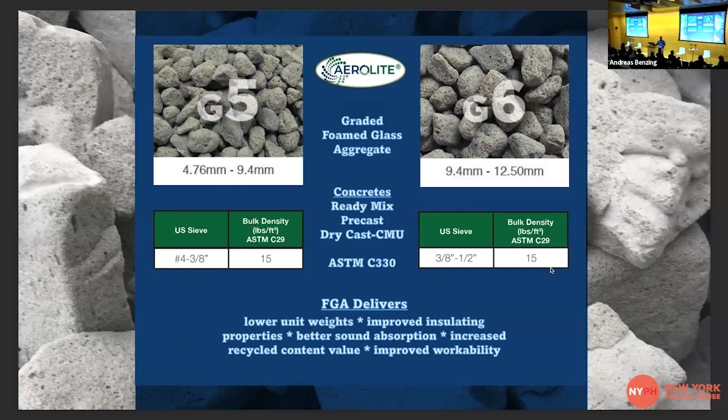This material recently got ASTM C330 approval, so foam glass aggregate is now approved as a lightweight aggregate for use in structural concrete. As the particles get bigger, you get more insulation value and the unit weight goes down; as particles get smaller, the unit weight goes up a little. But no matter what product you're using it for, it lowers the unit weight, improves insulation properties, absorbs sound, and is 100% recycled content.

Probably the coolest performance attribute is the thermal performance. Because of the R value of 1.7 per inch, if you introduce this into concrete, you greatly affect its thermal performance. This is one of the structural mixes from the previous slide, and you can see the R value. Standard concrete has an R value of 0.08, pretty much negligible. By adding the foam glass aggregate, I've changed the R value to 0.54. If you do thermal modeling based on that, it's a game changer.

It's completely different. As far as passive houses, a really great detail is if you put the foam glass aggregate below the slab, then put the graded foam glass aggregate in the slab in the ready mix, you now have sub-slab insulation and in-slab insulation. It's the perfect scenario for good performance.

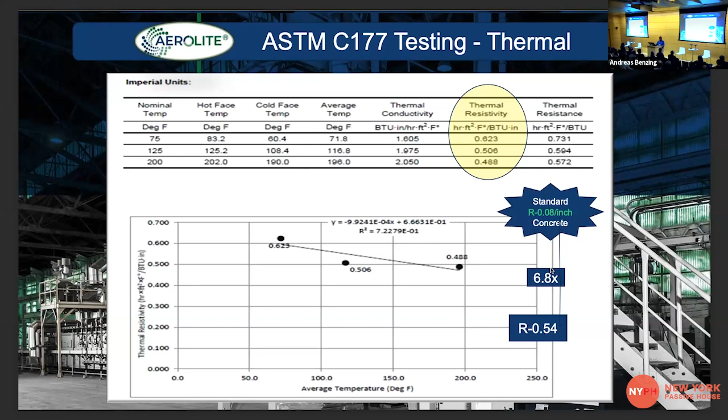Here's another one - this is a tunnel infill, a really cool application. When you have existing buildings, old infrastructure, and you're trying to bring them back, a lot of times you rip things out and need to fill. This is an incredible material to fill with. They were literally filling tunnels before continuing to reconstruct this building - a great opportunity to place recycled material.